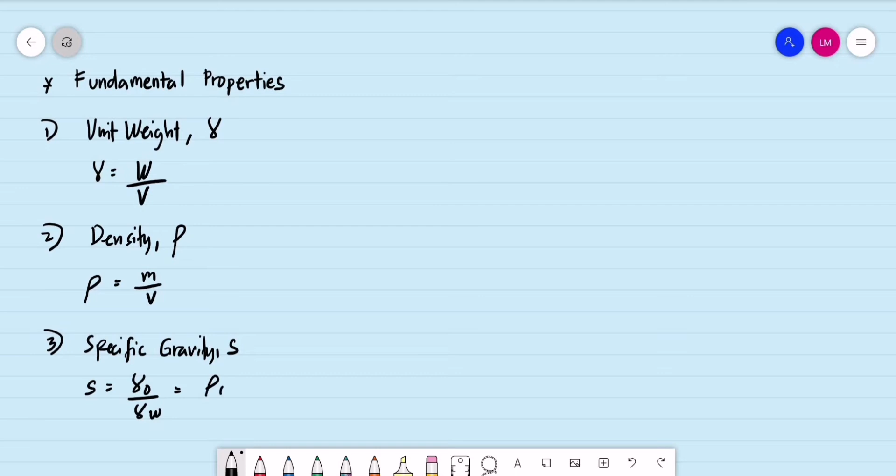So specific gravity in fluid mechanics, what we use is the small s. The specific gravity of any object is the unit weight of any object divided by the unit weight of water. Or this is the same as the density of any object divided by the density of water. If you notice, our universal reference is water.

So we should know the fundamental properties of water. We have the unit weight of water. Most of the time in board exams, this is not given. It's 9.81 kilonewtons per cubic meter. This is the same as 9,810 newtons per cubic meter, or in English units, 62.4 pounds per cubic foot. Then we have the density of water, equal to 1,000 kilograms per cubic meter. Or we can have it as 1 gram per cc or 1 gram per cubic centimeter.

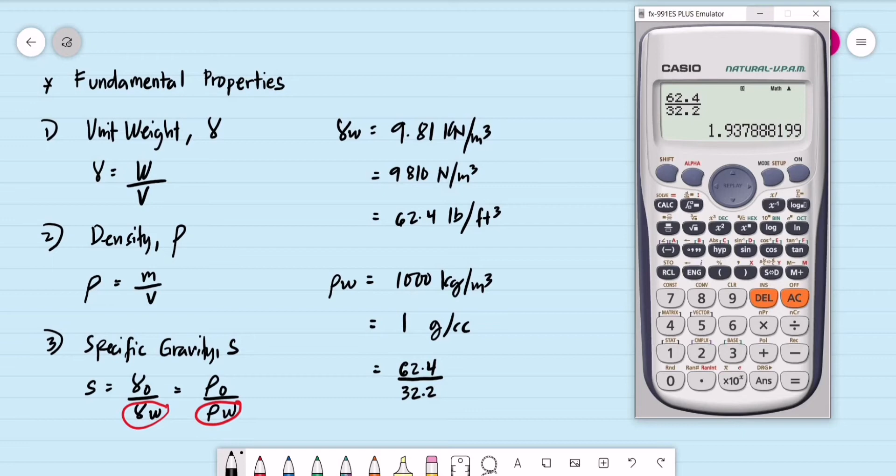In English units, this is 62.4 pound force or pound weight. We'll make it pound mass simply by dividing by the acceleration due to gravity in English units, 32.2. So what would that value be? We have 62.4 divided by g in English, 32.2. That is 1.938. This becomes pound mass per cubic foot. Or pound mass can also be called slugs. So pound mass is the same as slugs per cubic foot.

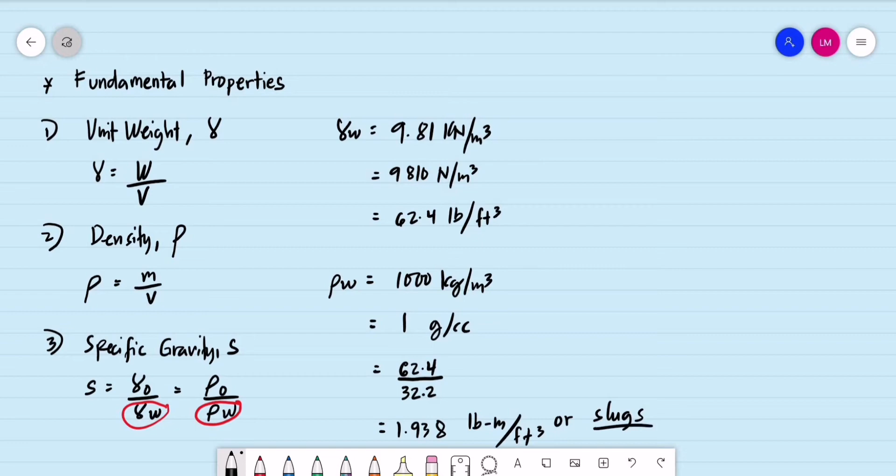So we should know these basic properties. Let's have an example that came out before in the board exam. A situational problem with 3 questions - problem 1, 2, and 3.

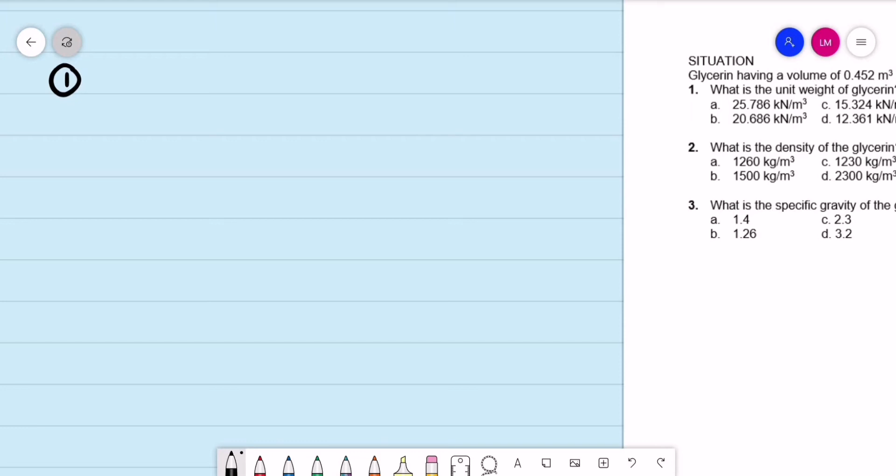So glycerin having a volume of 0.452 cubic meter weighs 5,587 newtons. What is the unit weight? Question number 1. Just observe the unit of the choices - this is in kilonewtons per cubic meter. So basically we'll just do unit analysis.

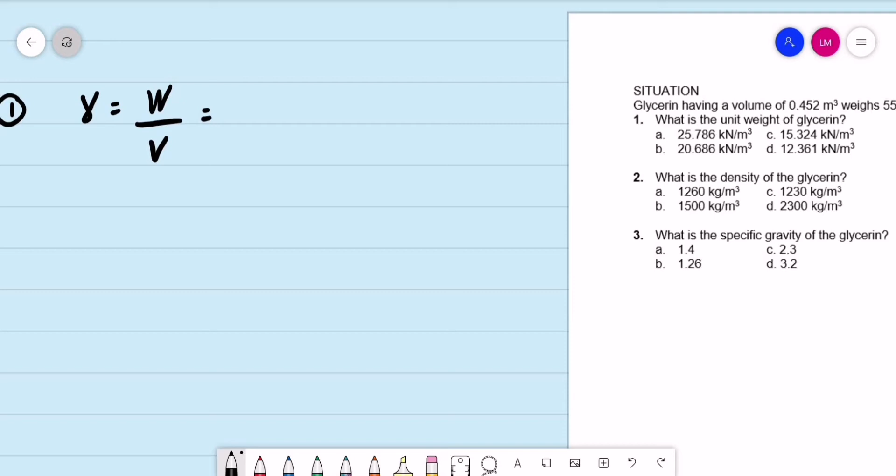So the unit weight is gamma, that is equal to the weight divided by the volume. The given weight in this problem is 5,587 newtons. Then its volume is given as 0.452 cubic meter. So we just need to convert. What is the equivalent of 1 kilonewton? This is the same as 1,000 newtons, just so we can cancel out the unit newtons.

So if you do unit analysis, what's left is the unit in kilonewtons per cubic meter. So computing for number 1, this is 5,587 divided by 0.452, then divided by 1,000, so it becomes kilonewtons per cubic meter. Let's say this is 12.361 kilonewtons per cubic meter. So that's how number 1 goes. Our answer for number 1 will be letter D, 12.361 kilonewtons per cubic meter.

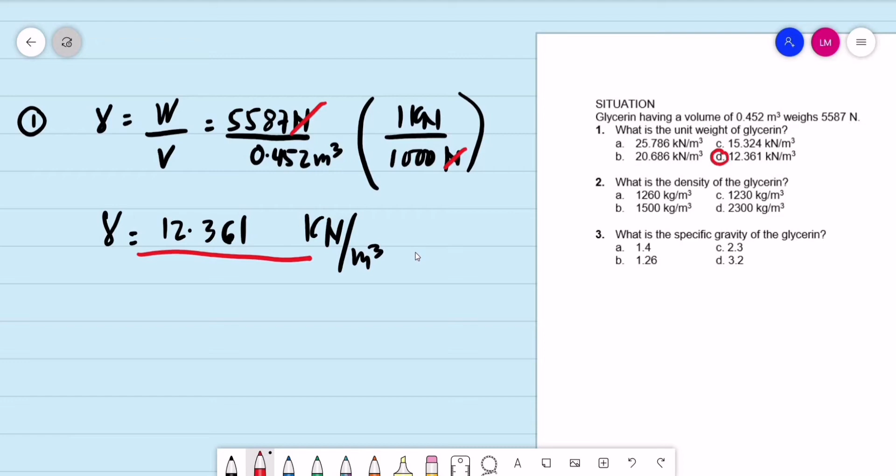So for number 2, what is the density of the glycerin? The unit is kilograms per cubic meter. For number 2, density is equal to mass divided by the volume. So let's convert the weight into mass.

We have the density equal to 5,587 newtons divided by the volume, 0.452 cubic meter, multiplied by - what is the equivalent of 1 kilogram in newtons? This is 9.81 newtons, so 9.81 newtons is 1 kilogram. We cancel out the unit newtons, so what's left will be the unit kilograms per cubic meter.

So we'll be getting the density. The density will be equal to 5,587 divided by the volume, 0.452, divided by 9.81. So this is equal to 1,260.002.

Okay, 1,260.002. Ang unit na naiwan ay kilograms per cubic meter. So sa choices natin, 1,260, that will be letter A.

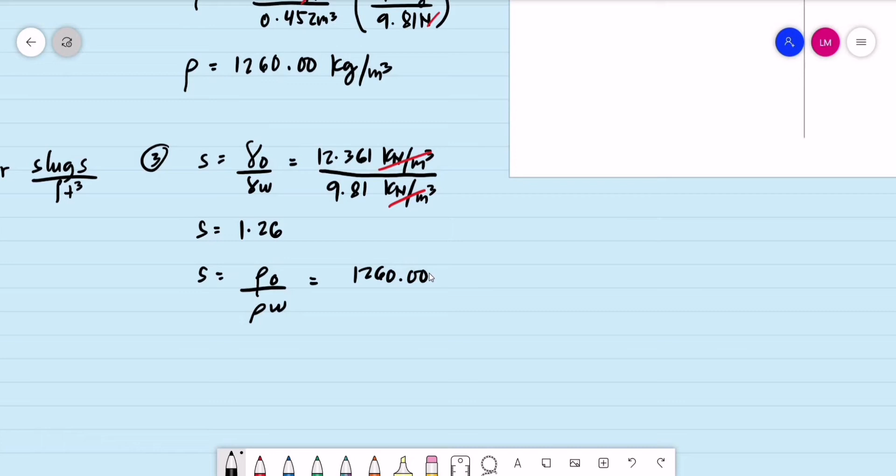Pwede rin naman gamitan class ng rho. Kung gagamit naman tayo ng rho, the specific gravity is the density of any object divided by the density of water. Ano ba yung nakuha natin na density? 1,260.00002 yata ito kanina, dapat yung unit nito ay kilograms per cubic meter. So dapat unitless, dapat the same unit yung rho water, density of water, 1,000 kilograms per cubic meter. So canceling yung unit, ang specific gravity natin will be the same as 1.26. So it's either using yung gamma, pwede tayong gumamit ng gamma, o di kaya density.

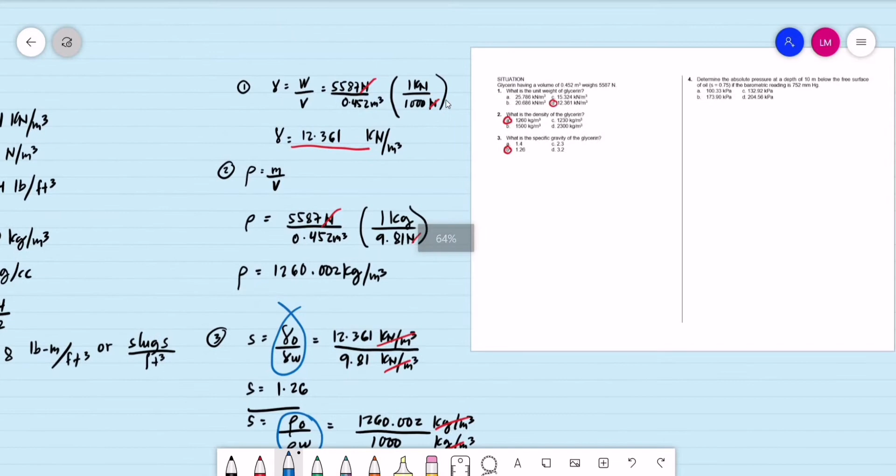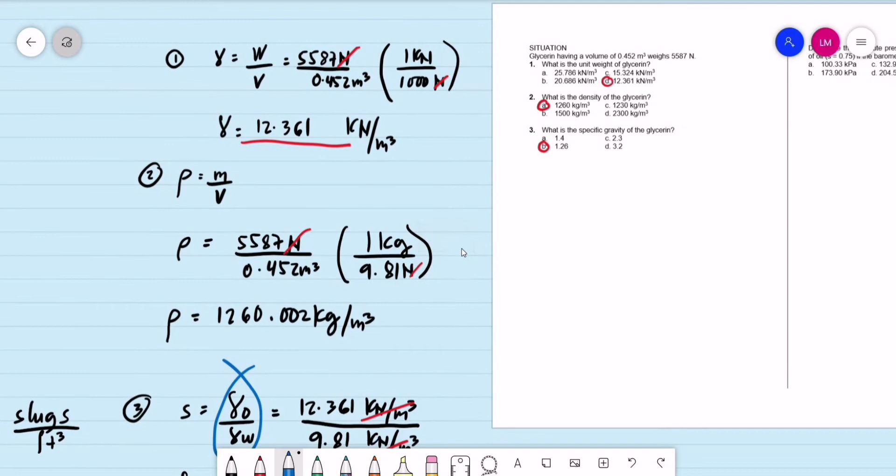Ito yung mga tinatawag natin na appetizer problem sa hydraulics, pati rin naman sa geotech. It's either lupa or tubig or any liquid. Ito yung mga tinatanong minsan: the unit weight, the density, at the specific gravity. So that will be our solution for problem 1 to 3.

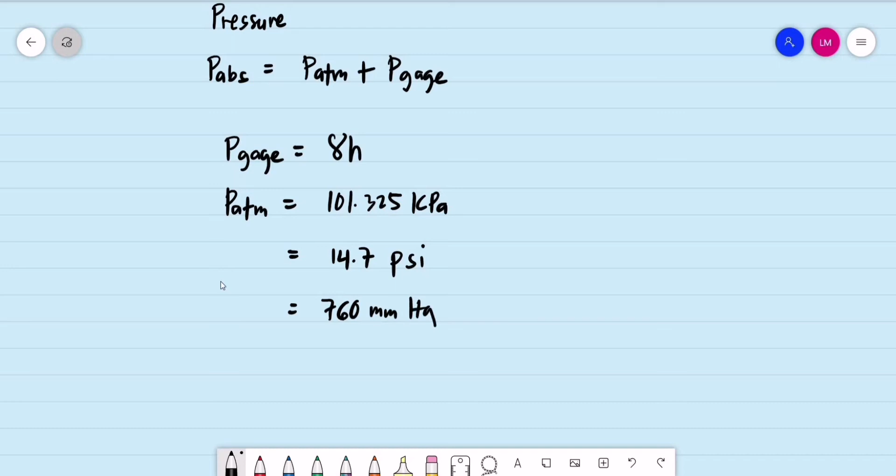Pag-usapan naman natin ang pressure. Dito sa fluid mechanics, meron tayong tinatawag na absolute pressure o pressure absolute. Ang equivalent nito ay yung atmospheric pressure plus the pressure gauge. Basically, pressure gauge, supposedly pressure reading ito using a gauge. Pero dito, kapag manual computation, ito yung gamma H. Sa ilang cases na hindi given ang atmospheric pressure o PATM o barometric pressure, gamitin natin yung constants: 101.325 kilopascals, o pareho lang ito sa 14.7 pounds per square inch kapag English. Kapag in terms of the height of mercury naman, ito yung 760 millimeters of mercury. Yung mga values na ito ay sa sea level, yung atmospheric pressure at sea level.

Let's have an example, problem number 4. Determine the absolute pressure at a depth of 10 meters below the free surface of oil with a specific gravity of 0.75, if the barometric reading is 752 millimeters of mercury. So meron tayong oil dito na ang specific gravity ay 0.75. Ang depth ng liquid ay 10 meters.

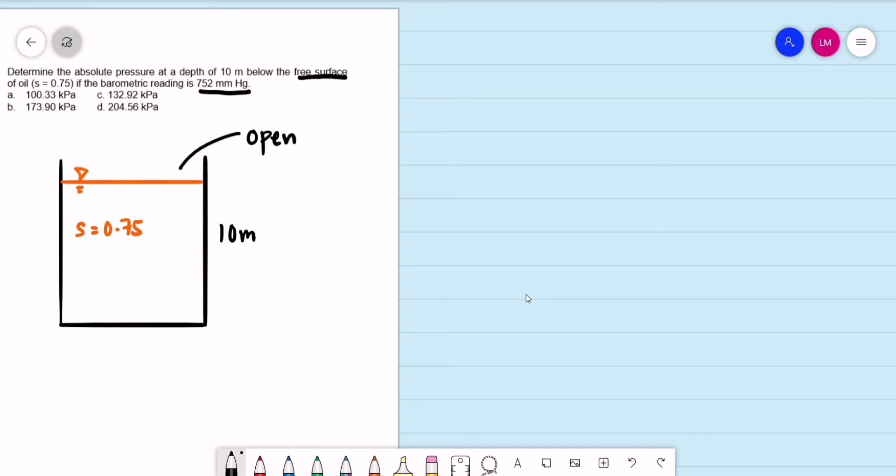Kapag ginagamit rin yung term na open tank o yung sinabi niyo sa problem na ito, free surface, magko-consider tayo ng atmospheric pressure. Kapag sinabing closed tank, magne-neglect tayo ng atmospheric pressure. So hinahanap yung absolute pressure, that is P absolute is equal to the atmospheric pressure, PATM, plus the pressure gauge, sabihin ko na lang P sub G. Pero in terms of the height of mercury, most of the time sa mga board, hindi given yung specific gravity ng mercury, so dapat alam natin na yung specific gravity ng mercury ay 13.6.

So yung given na height niya is 752 millimeters, kung gagawin kong meter, ito yung 0.752 meters of mercury. Ang gagamitin na lang natin sa pagkuha ng pressure absolute dito, pressure absolute is the summation of gamma H. Paano pala kumuha ng gamma ng ibang liquid? Ang specific gravity ay unit weight of any object divided by unit weight of water. Kaya kung gusto kong kumuha ng gamma o unit weight ng ibang object o ibang liquid, ito yung kanyang specific gravity times the gamma of water. So summation of gamma H tayo.

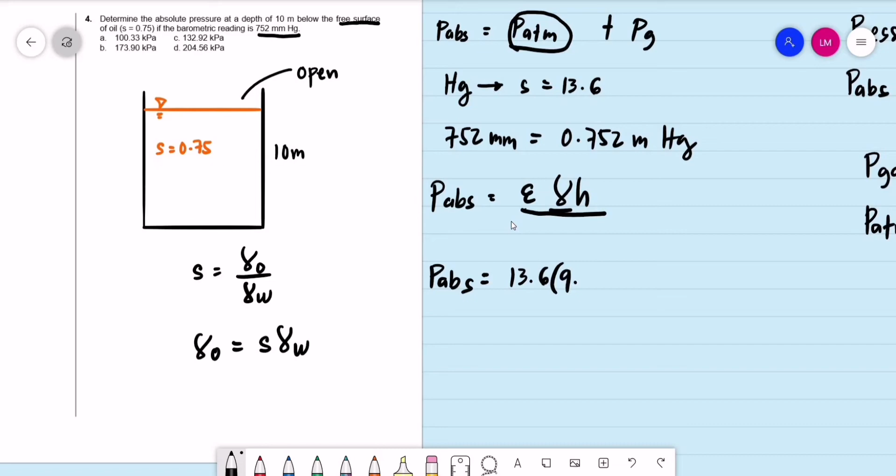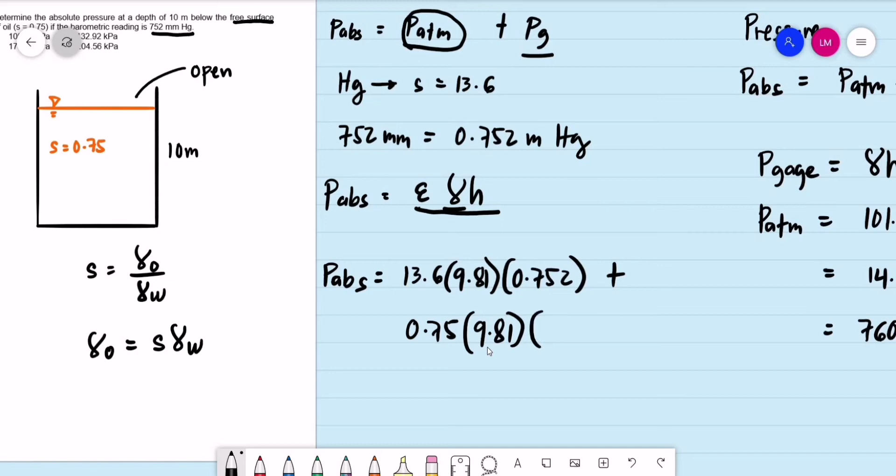We have the pressure absolute, unahin natin yung atmospheric pressure. Atmospheric pressure is mercury, ano yung gamma ng mercury? Ito yung 13.6 times gamma water, 9.81. Ano yung height ng mercury o yung barometric pressure, the atmospheric pressure? That is 0.752 meters o yung given na 752 millimeters. Ito yung ating PATM, plus pressure gauge is gamma H. Ano yung unit weight ng oil? Ito yung 0.75 para maging gamma ng oil times gamma water, 9.81. Ano yung height ng oil? Given na 10 meters. So this will be the total pressure dun sa ilalim ng tank o ang absolute pressure.

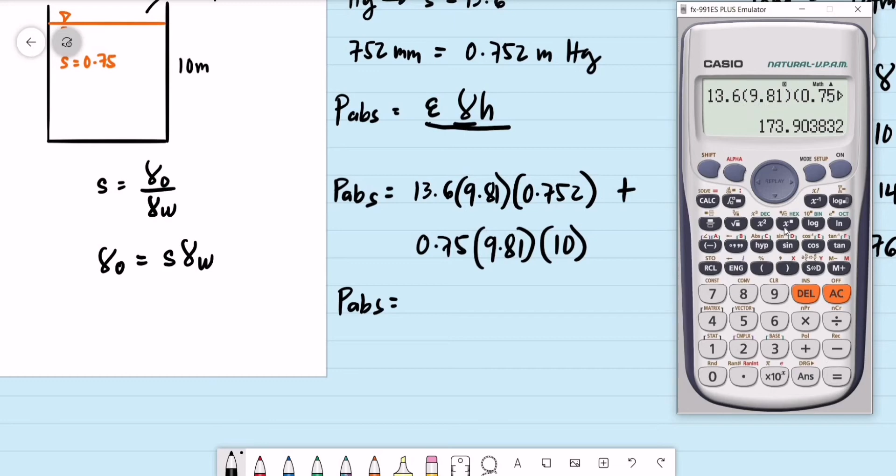So computing for that value, that is 13.6 times 9.81, ito yung gamma ng mercury, yung height dun sa barometer is 0.752, ginawa kong meter. Plus sa oil, 0.75 times 9.81, ito yung gamma oil, yung height ng oil ay 10 meters. So that will be equal to 173.904.

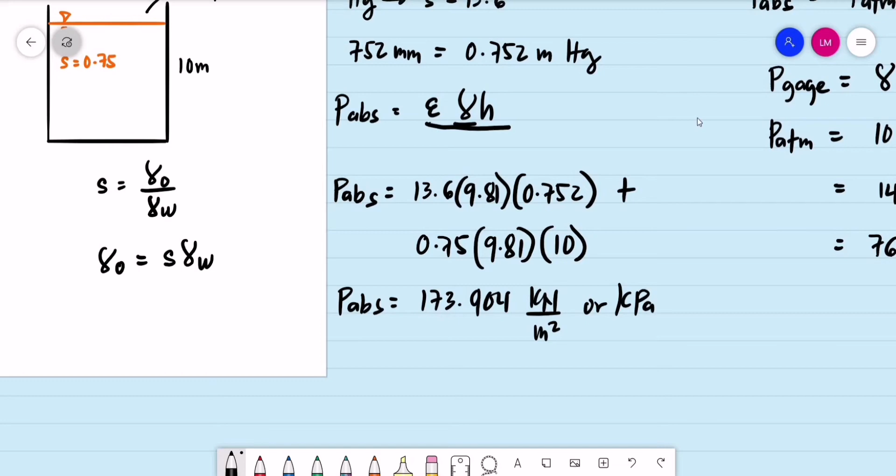Kilonewtons per square meter, kung mag-unit analysis tayo, kilonewtons per square meter or pareho lang ito sa kilopascals. Okay, check natin sa choices. Problem number 4, pinakamalapit na value, 173.9, that will be letter B for question number 4. So ito yung solution natin for problem number 4.

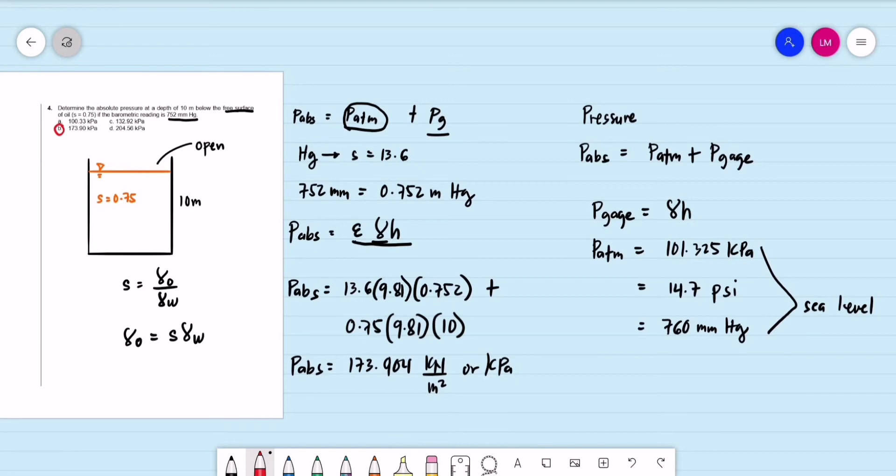Okay, so dito naman tayo sa problem number 5. In the figure shown, if the atmospheric pressure is 101.03 kilopascals and the absolute pressure at the bottom of the open tank is 231.3 kilopascals, what is the specific gravity of the unknown liquid?

Okay, so take note na kapag layers of liquid, as we go down, habang papailalim, yung specific gravity ay nag-i-increase. So kung i-observe natin, 0.89, 1, so basically that is water. Ito yung unknown specific gravity. Tapos mercury, 13.6.

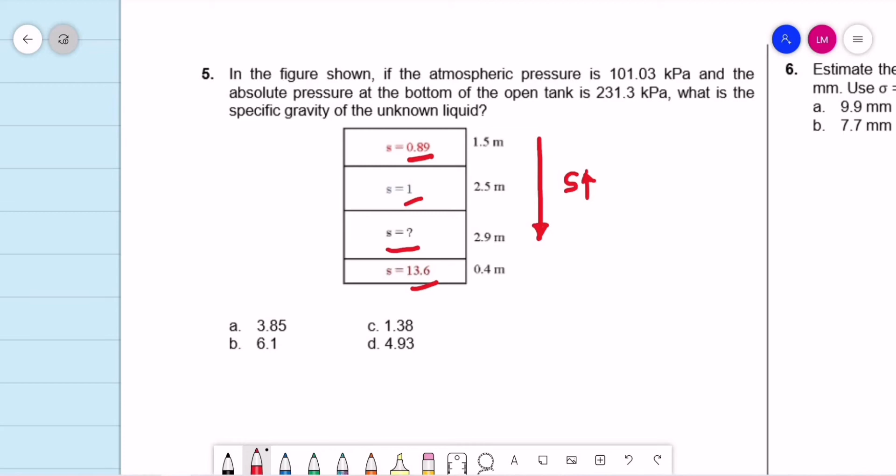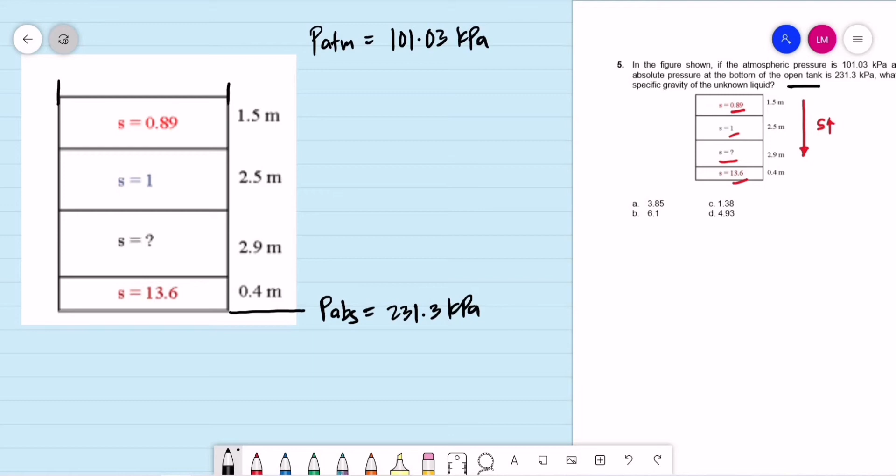Okay, so according dito sa problem, meron tayong atmospheric pressure. So let's say we have P atm. Ito yung given, kaya ito yung gagamitin natin, 101.03 kilopascals. Then P absolute dito sa ilalim ng tangke, we have the absolute pressure is equal to 231.3 kilopascals. So sinabi niya rin class sa problem na open tank, okay, so this is an open tank. So supposedly open yung tangke natin, so hindi siya parang close, kagaya nitong sa figure.

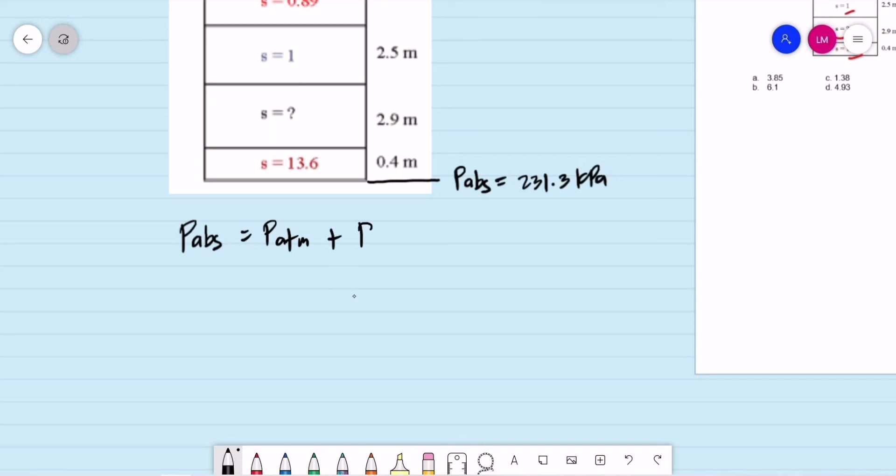So how do we compute for absolute pressure? Ano ba equivalent ng absolute pressure? We have P absolute, the pressure absolute is basically equal to the atmospheric pressure, P atm, plus the pressure gauge. So sabihin ko na lang P sub G yung pressure gauge. So ano yung magnitude ng P absolute? We have 231.3 kilopascals is equal to P atm, 101.03 kilopascals plus the pressure gauge.

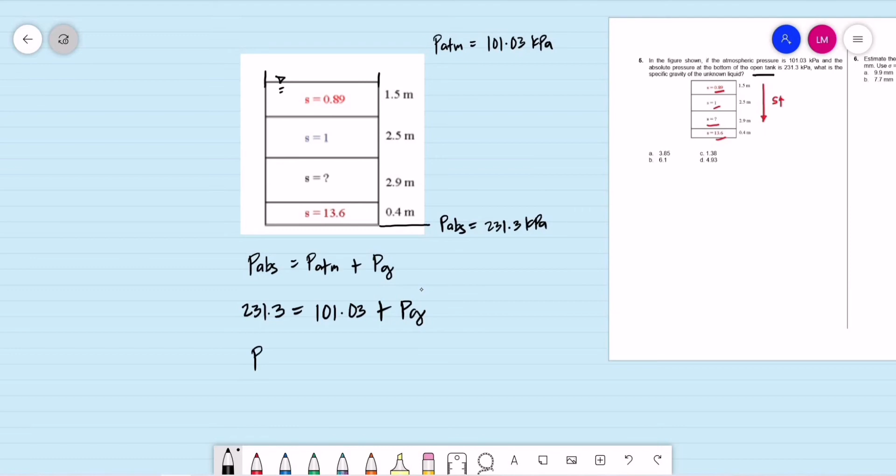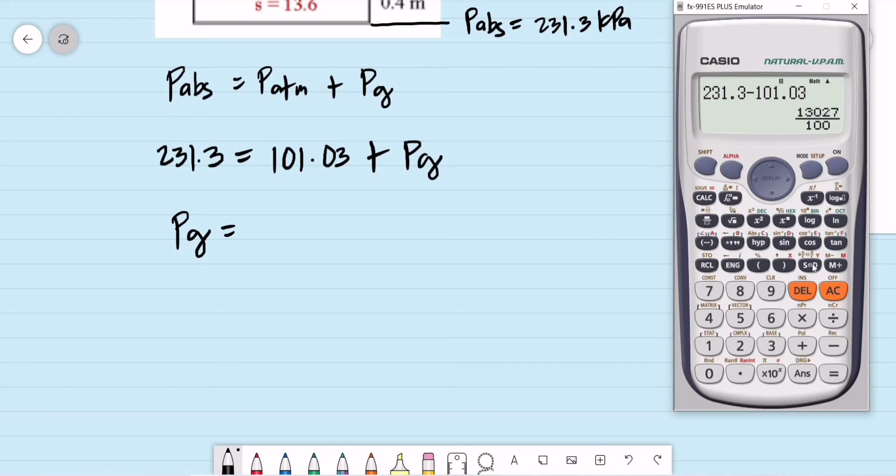So compute natin yung equivalent ng pressure gauge. So that is the same as 231.3 minus 101.03. So yung lumabas dito is equal to 130.27 kilopascals. So yung pressure gauge na ito ay supposedly pressure reading using a gauge. So paano ba tayo nagko-compute ng pressure gauge? Kapag layers of liquid, ito yung summation of the unit weight of the liquid multiplied by their corresponding height. So dapat in terms of kilopascals, we have that as 130.27 kilopascals.

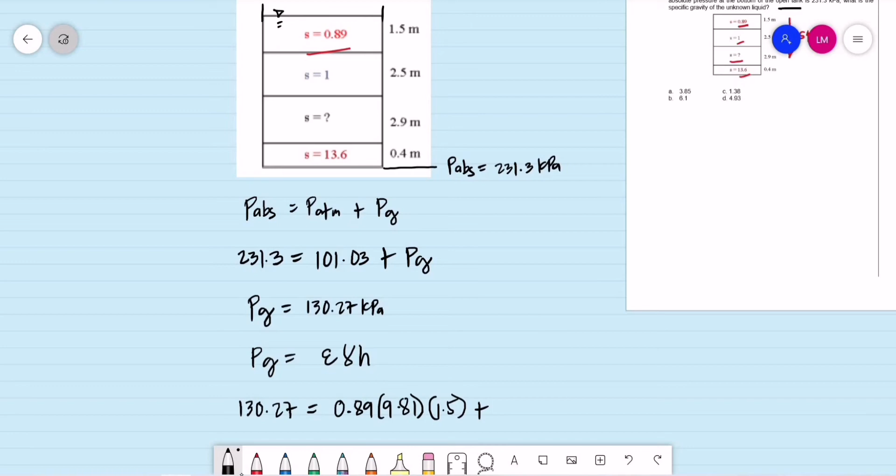Is equal to, consider natin yung first liquid, meron siyang specific gravity na 0.89 times gamma water, 9.81, para maging unit weight ng liquid na ito. Then multiplied by its corresponding height, 1.5 meters. Then plus, the next specific gravity is 1, tubig lang ito, that is 9.81 times yung height niya ay 2.5 meters. Then plus, yun yung specific gravity ng unknown liquid, S, times gamma water, 9.81, tapos corresponding height is 2.9 meters. Okay, plus yung last layer natin is mercury, we have that as 13.6 times 9.81, yung kanyang height is equal to 0.4.

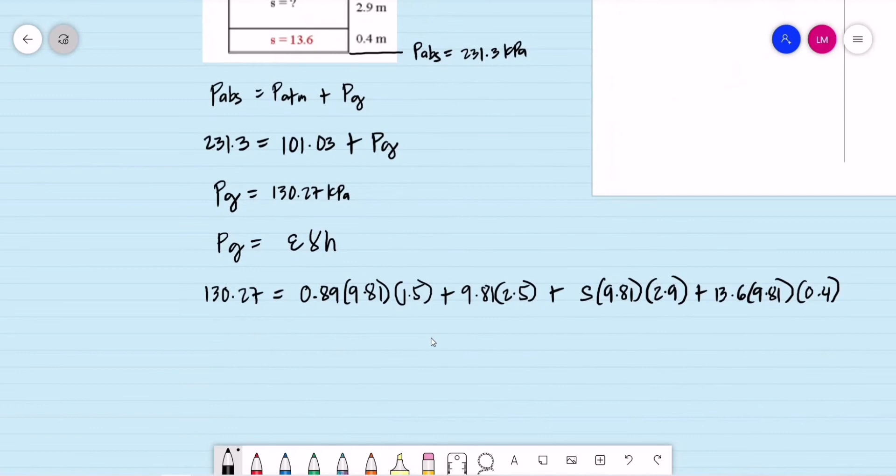So kung titingnan natin yung equation na ito, ang unknown na lang is yung specific gravity S. So let's compute. So we have that as 130.27 is equal to, yung first layer is 0.89 times gamma water, 9.81, corresponding height is 1.5 meters. Then plus, tubig lang, 9.81, its height is 2.5. Then plus, sabihin na lang natin, S for the unknown liquid ay 9.81, tapos yung height niya is 2.9 meters. Then plus, last layer, mercury, 13.6 times 9.81, yung height niya is 0.4. So shift solve tayo.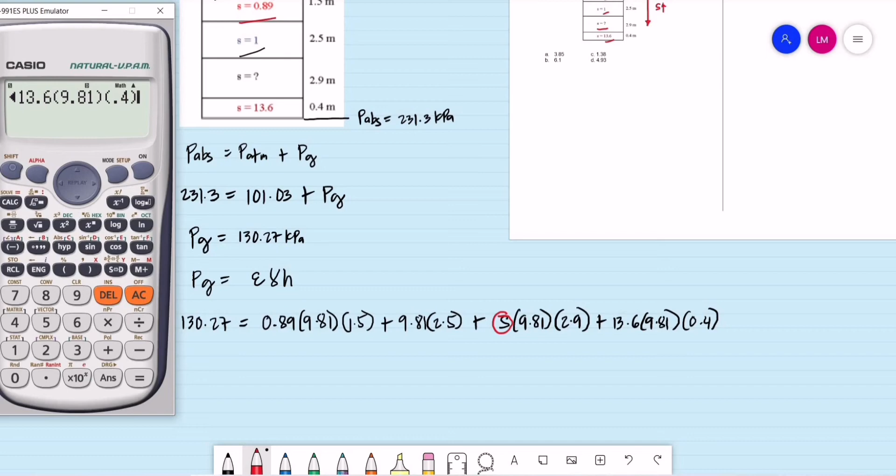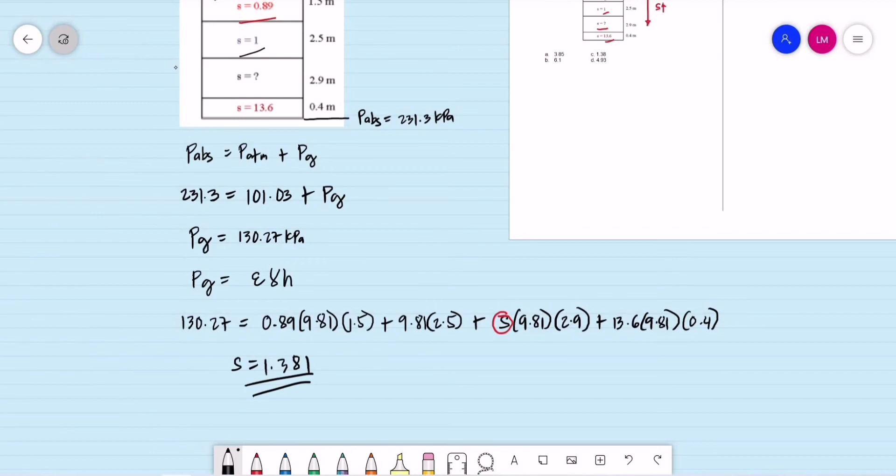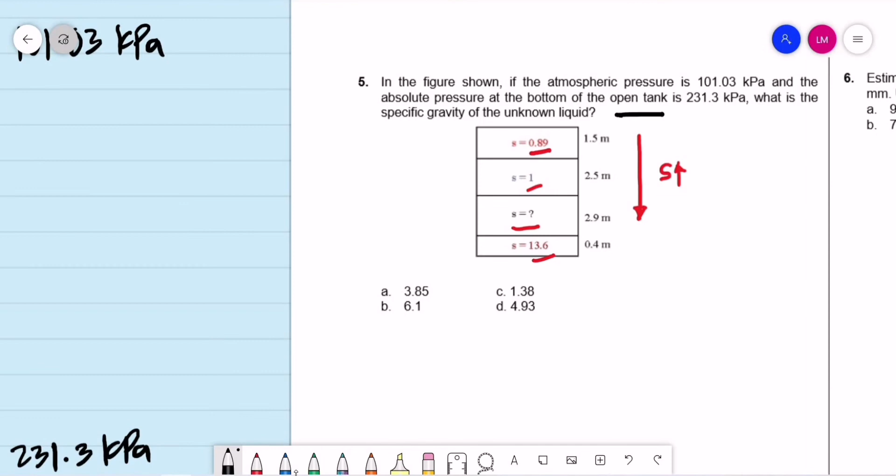So yung lumabas dito is equal to, we have the specific gravity of the unknown liquid is 1.381. Okay? So that is 1.3807 or 1.381. If you are to check that value sa choices natin, so 1.381 for question number 5, so that will be letter C. So this will be our solution for question number 5.

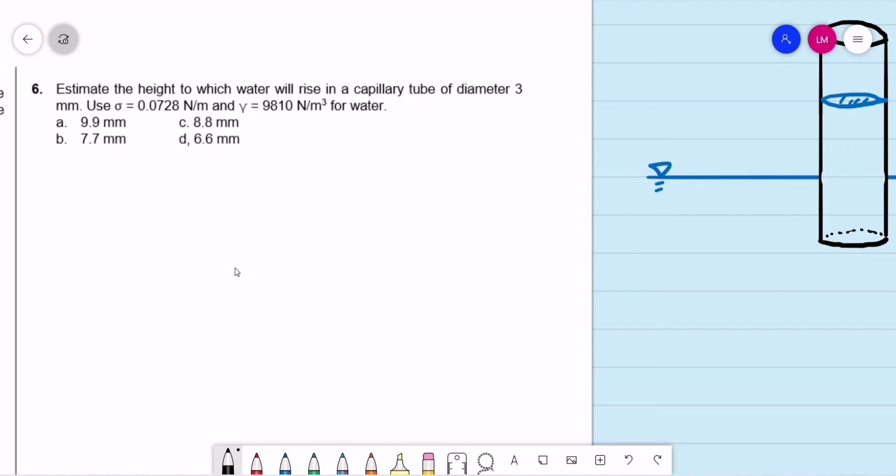Okay, so we go to problem number 6. Estimate the height to which water will rise in a capillary tube of diameter 3 mm. Use sigma equal to 0.0728 Newton per meter. And alam natin ito, gamma water, 9,810 newtons per cubic meter. So ito yung capillary rise. Ito yung kapag nagsawsaw tayo ng maliit na tube. Okay, kindly observe, napakaliit ng diameter, 3 mm. Kapag nagsawsaw tayo ng maliit na tube sa isang liquid, ang mangyayari is papasok yung liquid.

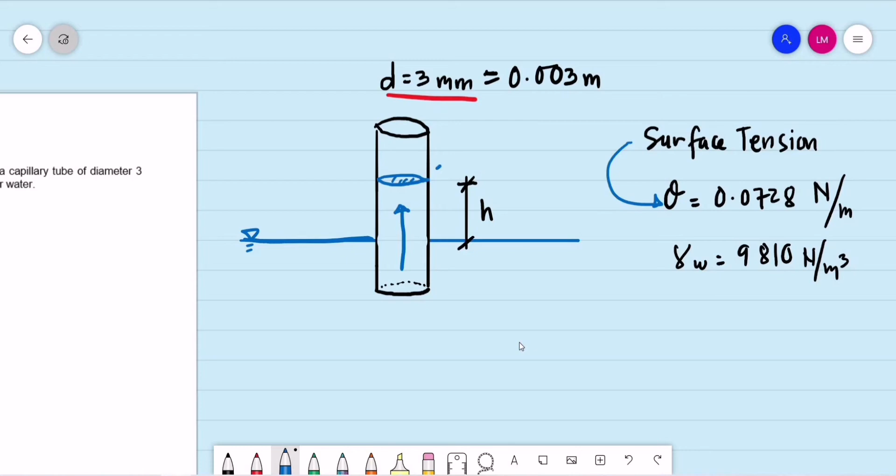Okay, that is, tataas siya compared to the normal level ng liquid. So, kakapit siya dito sa tube. Bakit siya kakapit? That is because of the surface tension. So, yung sigma na given kanina, yun yung surface tension.

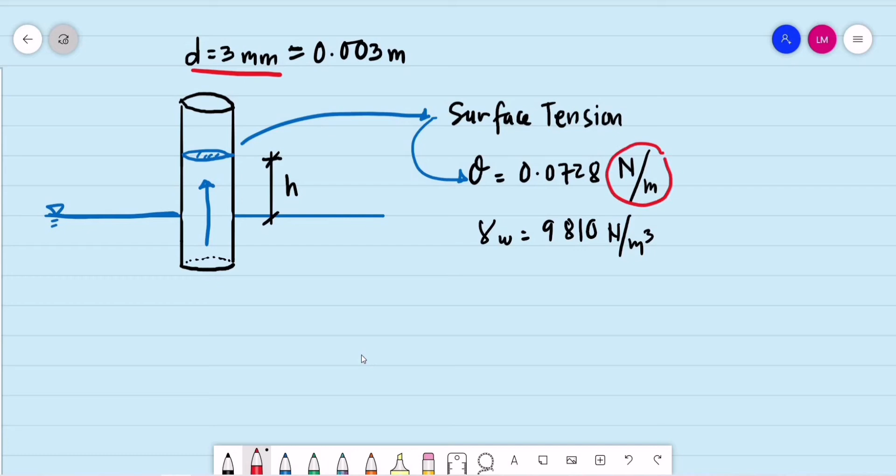Usually, ang given na unit nito sa mga problems ay nasa Newton per meter. So, how do we compute for the rise of the liquid? We have the formula H is equal to 4 times the sigma, or the surface tension, then cosine of theta divided by the unit weight of the liquid times the diameter of the tube. Basically, yung formula na to nanggaling lang sa summation forces vertical equal to 0.

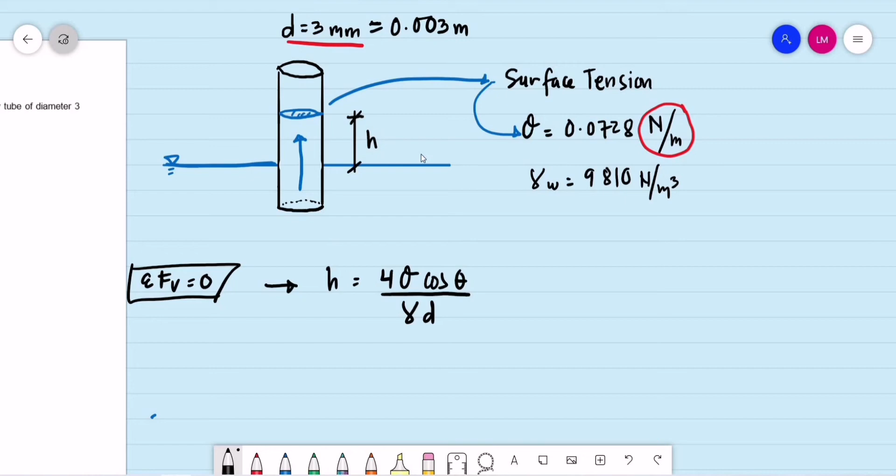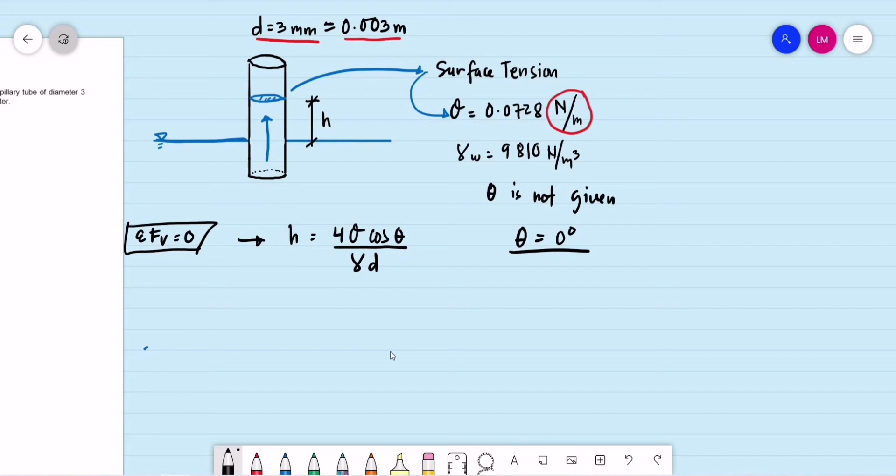So, summation forces lang yung pinanggalingan ng derivation niya. Okay, gawin natin na meter na lang yung diameter. That is 3 millimeters or 0.003 meter, para lang lahat ng given is in terms of meter. Then, kung hindi given yung value ng theta, we can assume the value of theta to be 0 degree. So, in some cases, kapag hindi siya given, pwedeng 0 degree. So, we have the capillary rise.

Let's substitute. We have the capillary rise equal to 4 times, the sigma is 0.0728 Newton per meter, that is the surface tension. Cosine of 0 degree, pero alam natin ang cosine 0 is simply equal to 1. Divided by the gamma water, 9,810 newtons per cubic meter. Then, the diameter of the tube, in meter na rin, 0.003 meter.

Yan. Kung mag-unit analysis tayo dyan, cancelling newtons, meter, meter, meter cube. So, cancelling yung meter na to, ang maiwan dito is meter na lang. Then, pupunta na siya sa numerator since denominator siya dun sa baba. We'll be having the value of H in terms of meter. Pero nasa millimeter yung nasa choices, kaya mag-multiply tayo ng 1,000 mm. This is per 1 meter. So, this will be the capillary rise.

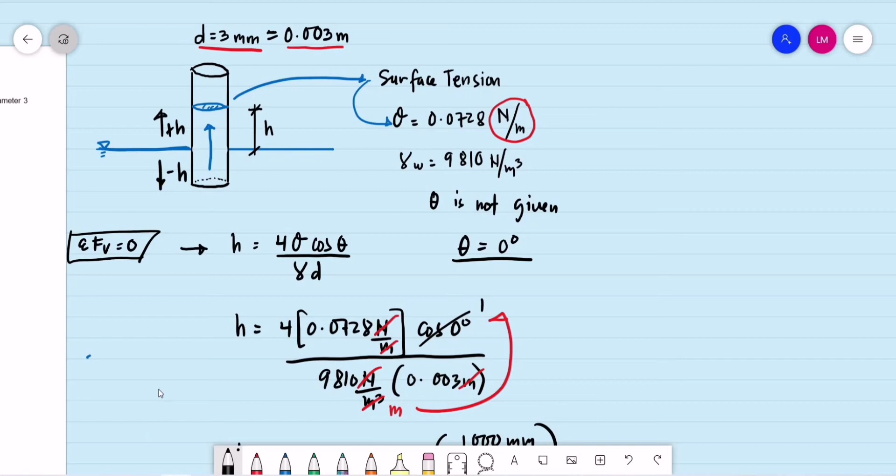So, kapag positive pala, kapag positive, obviously, pataas. Kapag positive yung H, pero kapag pababa naman, ibig sabihin nun, ang lalabas dapat is negative H. Yun naman yung capillary depression. So, computing for the value of H,

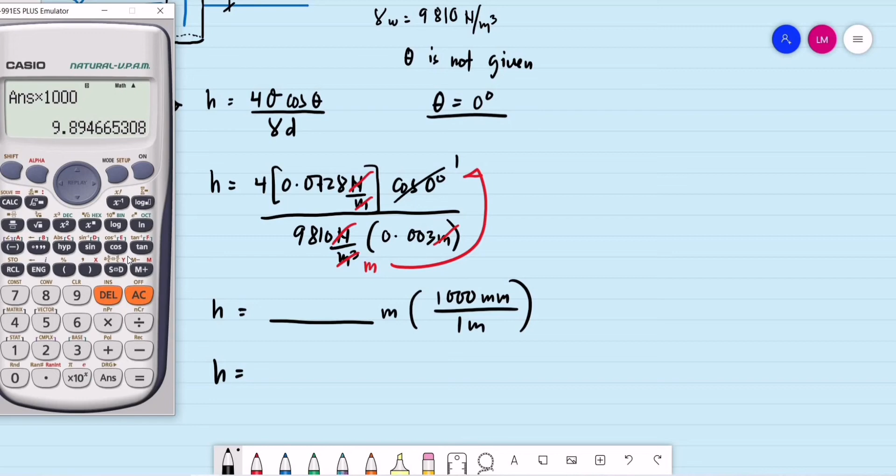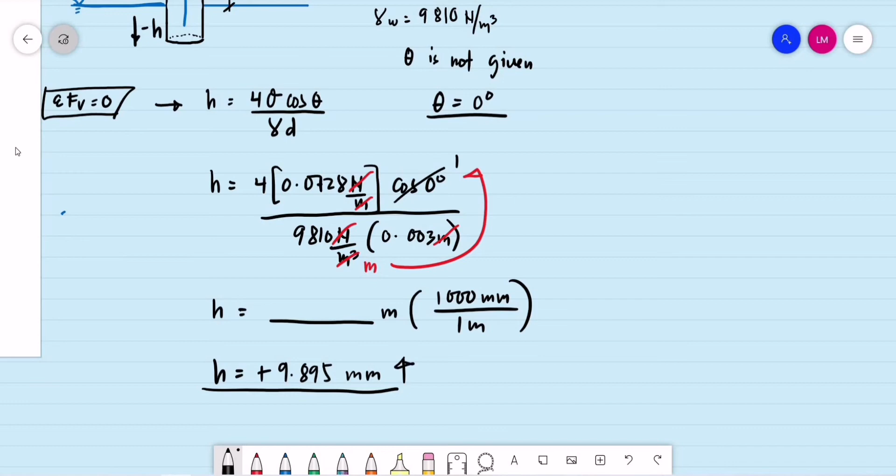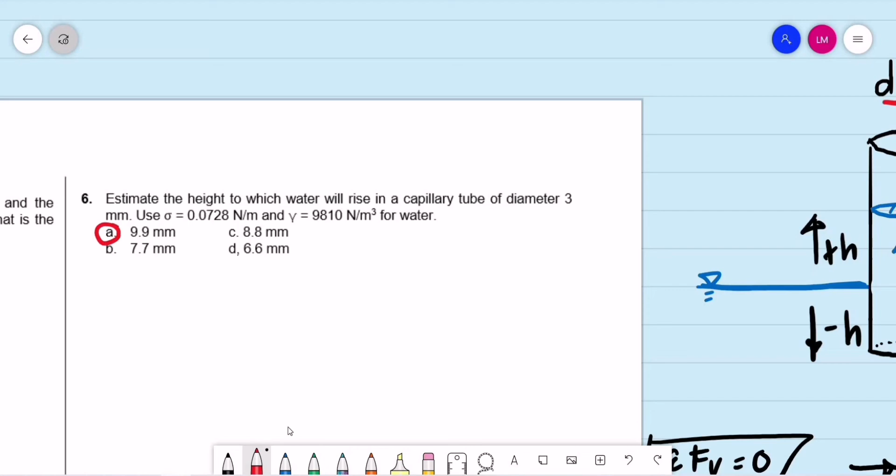4 times 0.0728, this is divided by gamma water is 9,810 times 0.003. So, this will be in terms of meter. Times 1,000 para maging millimeters, yung sagot natin, that will be equal to 9.895 millimeters. And it is positive, kaya ibig sabihin, capillary rise. Check natin sa choices, 9.895 mm. So pinakamalapit na sa choices natin will be letter A, 9.9. So this will be our solution for problem number 6, the capillary rise.

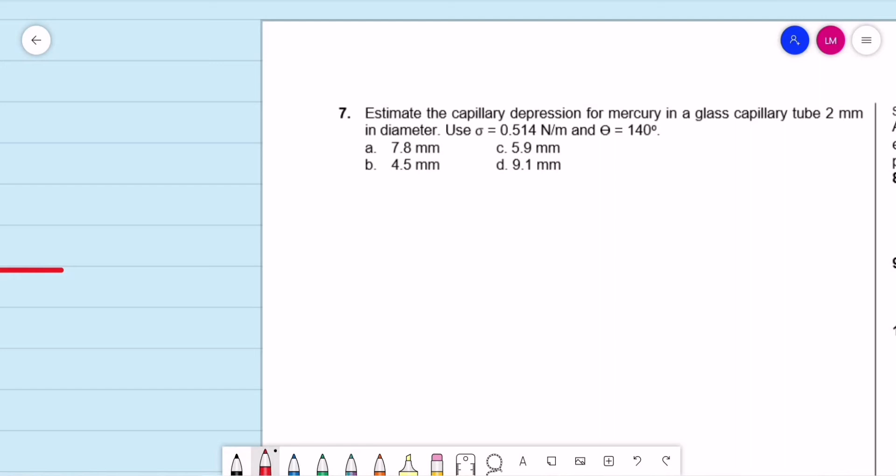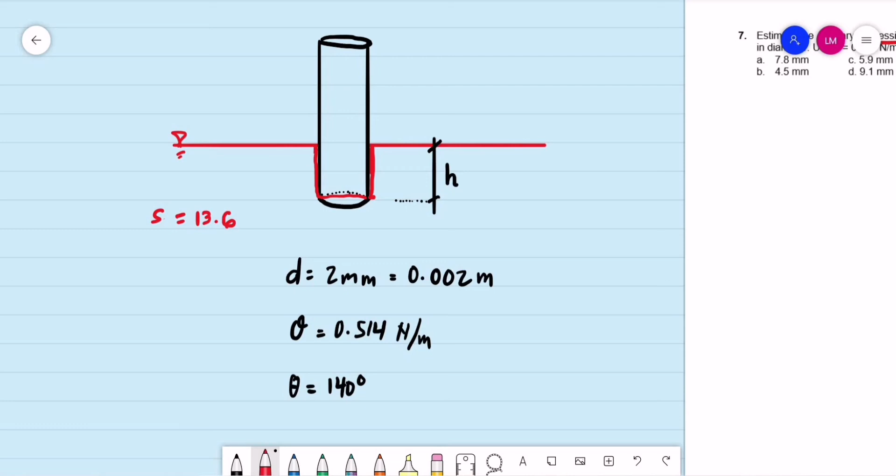Tuloy natin sa problem number 7. Estimate the capillary depression for mercury in a glass capillary tube 2 mm in diameter. Use sigma equal to 0.514 Newton per meter and theta is equal to 140 degrees. So, nangyayari yung capillary depression kapag malapot yung liquid or high viscous yung liquid or mataas yung viscosity. For example, kung magdidip tayo ng tube dito sa liquid mercury, hindi makakapasok yung liquid doon sa loob ng tube. So, ang term doon is the capillary depression. So, ito yung mga given, diameter, the surface tension, tapos given yung value ng theta equal to 140 degrees.

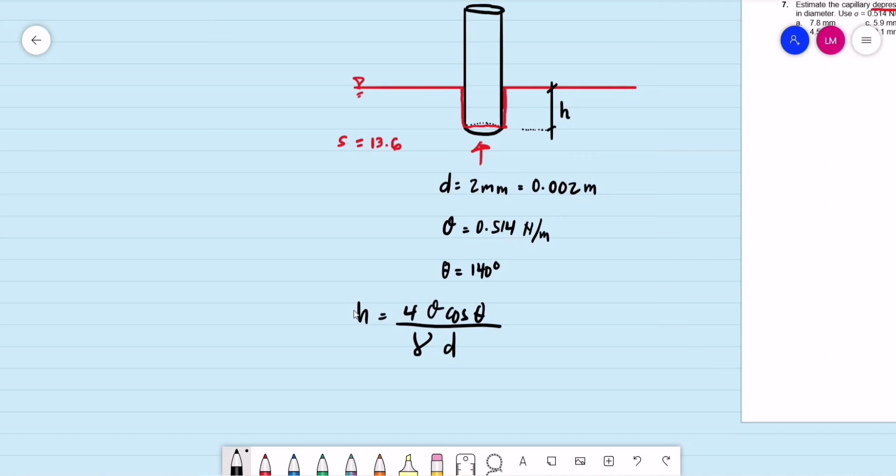So, computing for the capillary depression, H is equal to 4 times the sigma, cosine of theta, divided by the unit weight of the liquid times the diameter of the tube. So again, most of the time, hindi given yung specific gravity ng mercury, kaya paki-memorize. Okay, kunin natin yung equivalent value ng H. Substitution: 4 times 0.514 Newton per meter, multiplied by the cosine of theta, cosine of 140 degrees. To be divided by gamma ng mercury, that is 13.6.

Gamitin natin dito 9,810 newtons per cubic meter para consistent sa unit, that is for the gamma water. Diameter ng tube, 0.002 meter. So we'll be having the value of H. Kung unit analysis, cancelling newtons, this is meter, meter, meter cube. Itaas natin yung remaining unit, that is the meter. So ang expected unit ng value na to will be in meter.

So that is, we have 4 times 0.514, then cosine of 140 degrees, to be divided by gamma ng mercury, 13.6 times gamma water, 9,810. Tube diameter is 0.002. So we have that as, yung sign is negative 5.903 times 10 raised to negative 3 meter.

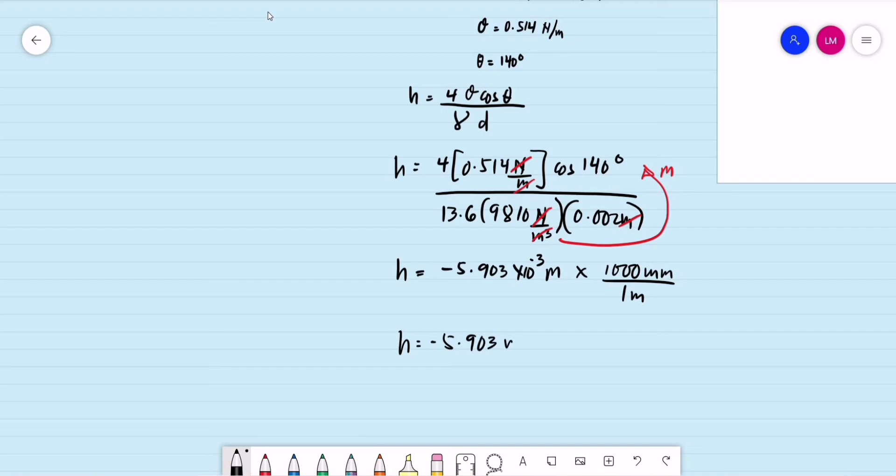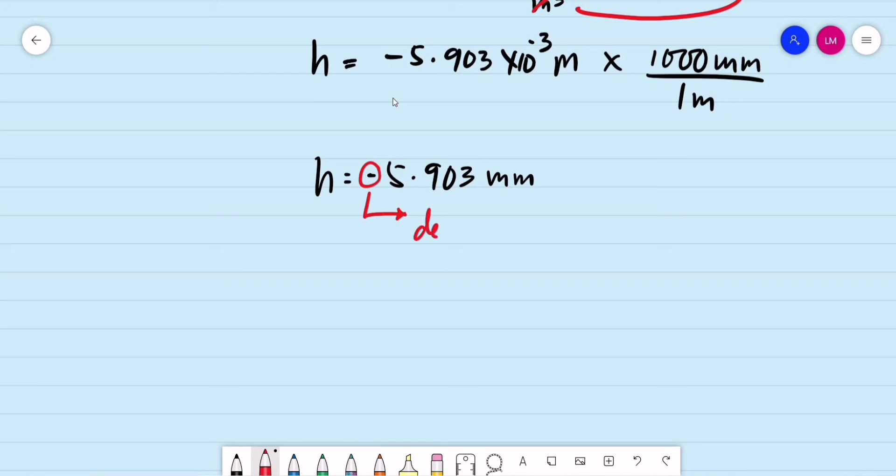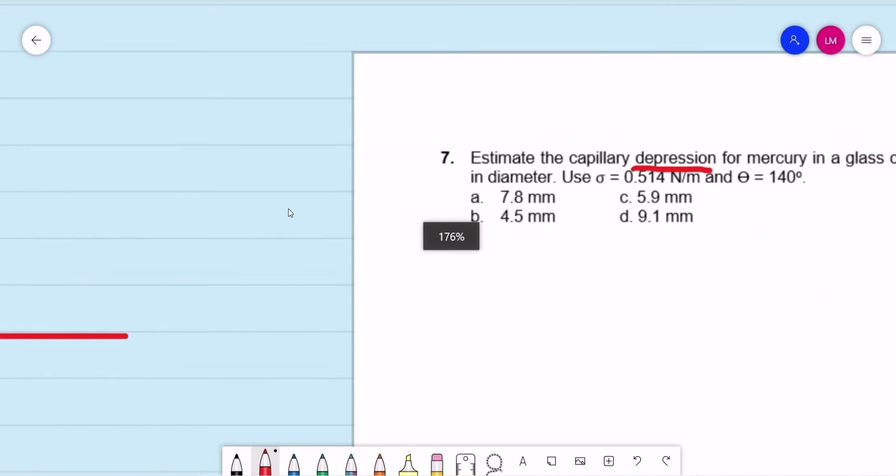Millimeters. Ano yung ibig sabihin ng negative sign? Basically, kapag negative yung nakukuha natin dito sa capillary, ang ibig sabihin lang naman ng negative is depression, the capillary depression. So check natin if we have this value sa choices, negative 5.903. Absolute value lahat nung nasa choices, lahat ay positive. So that will be letter C, 5.9 millimeters. That will be our solution for problem number 7.

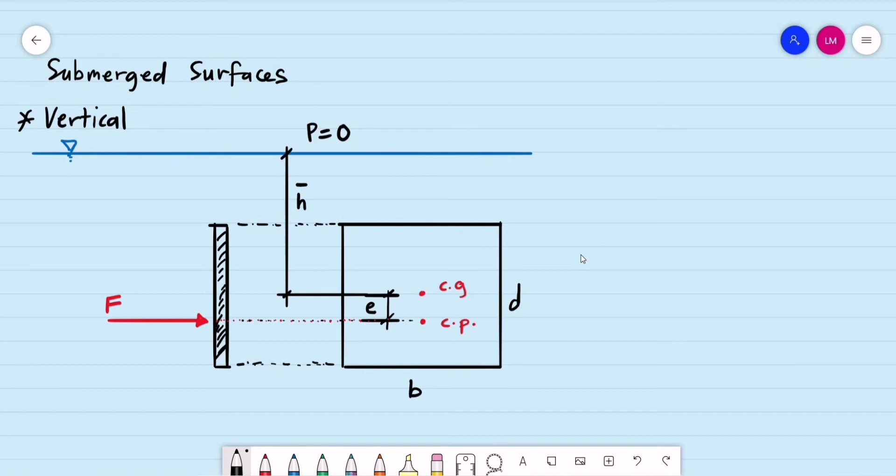We proceed to submerged surfaces. Unahin natin yung vertical submerged surface. So for example, we have this rectangular plate. Sabihin na lang natin na yung kanyang dimension ay B times D. The usual na tinatanong dito sa submerged surface is yung pag-compute ng total force acting on the submerged plate. So how do you compute for that force?

Kapag tubig, yung term is the hydrostatic force. That is, the force is equal to the unit weight of the liquid multiplied by the bar H multiplied by the area. Kung rectangular lang naman siya, basically the area is B times D.

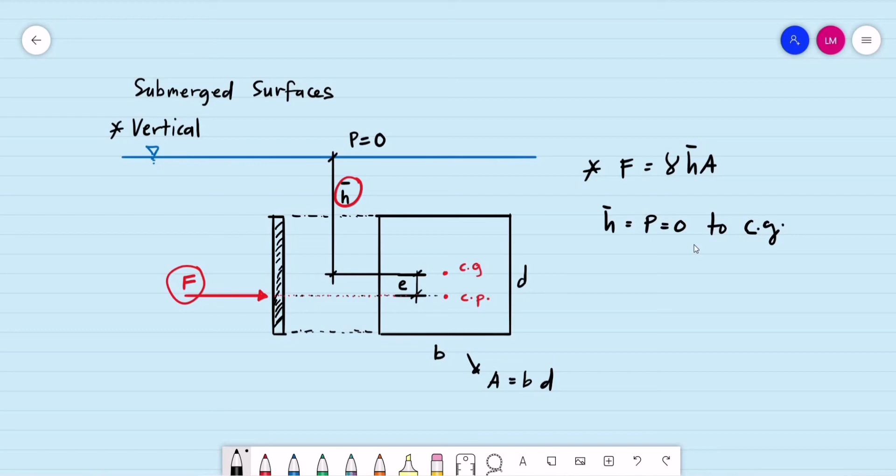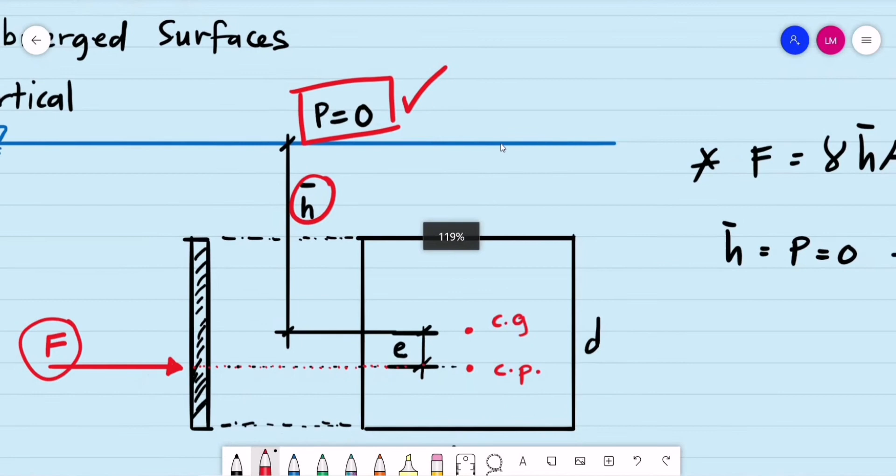Ano naman yung definition natin ng bar H or the H bar? Take note na applicable lang yung H bar na to kapag zero pressure yung surface, papunta sa center of gravity. Basically that it's the distance from the liquid surface considering na sinabi niya sa problem na zero pressure yung liquid surface. That is from the liquid surface to the center of gravity. That is the definition of bar H natin.

So zero pressure at the surface to the center of gravity. Kapag may pressure, for example kapag yung pressure sa liquid surface is not equal to zero, this formula is not applicable.

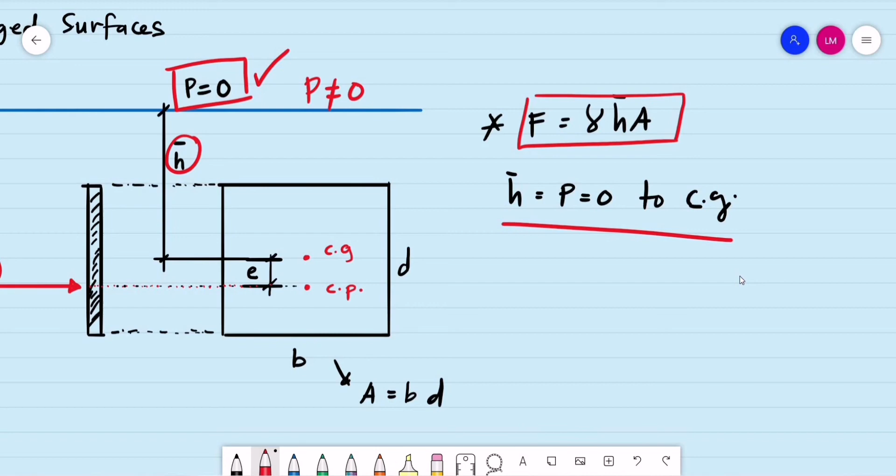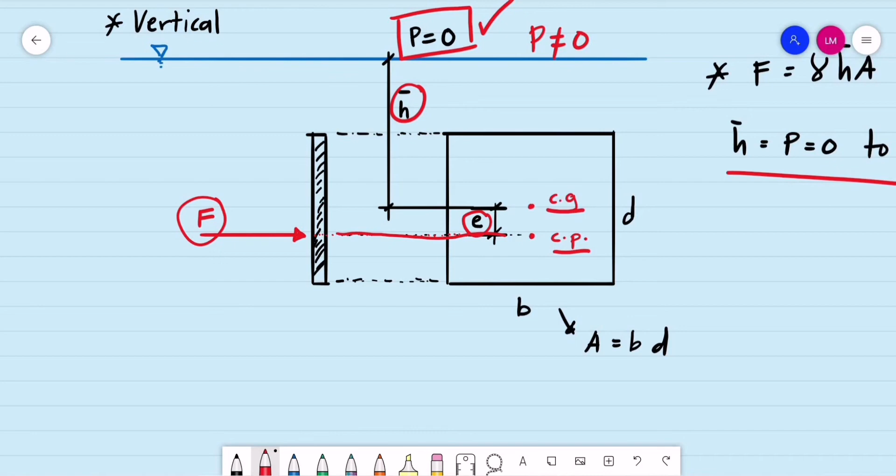So hopefully alam natin yung limitation ng formula na to. So saan ba yung point of action ng total force? Yung point of action of the total force is yun yung C sub CP. Sabihin na lang natin CP, that is the center of pressure. That is at a distance E from the center of gravity. So ano yung definition natin for E? Yung E dito is yung tinatawag natin na eccentricity.

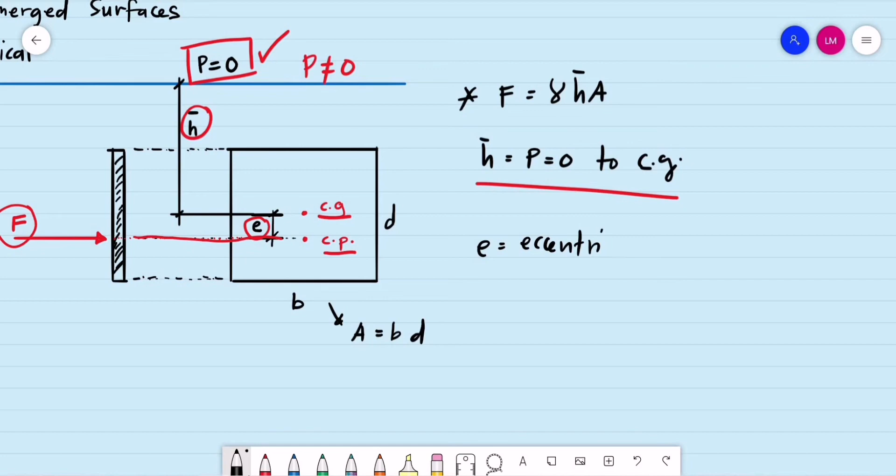So how do we compute for the eccentricity kapag vertical surface? That is, the eccentricity is equal to the moment of inertia of the section divided by the area of the section times the bar h. Again, yung formula na to is applicable only for vertical surfaces.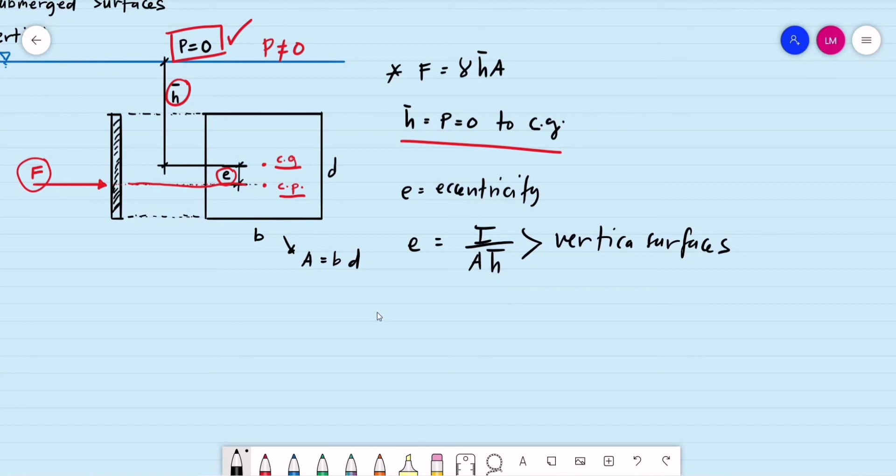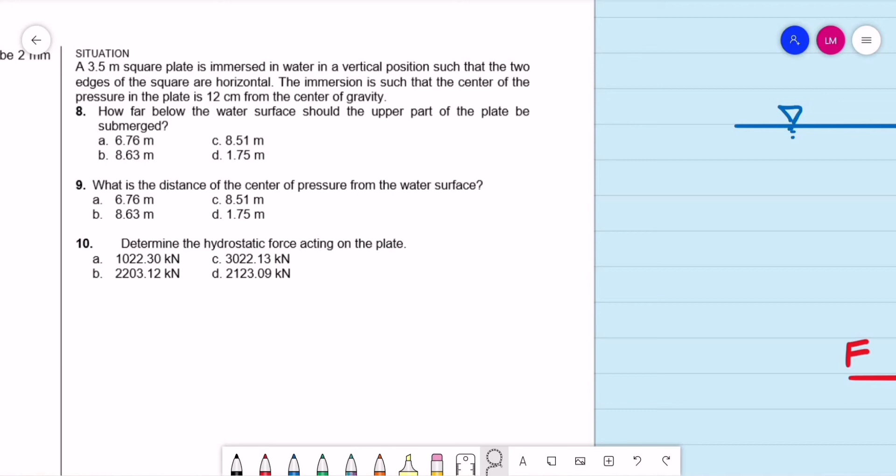Okay, so let's have an example for this case, let's have this situational problem. Lumabas na rin ito noon sa board exam. A 3.5 meter square plate is immersed in water in a vertical position such that the two edges of the square are horizontal. The immersion is such that the center of pressure in the plate is 12 centimeters from the center of gravity. Take note na yung distance from the center of pressure to the center of gravity, yung tawag natin doon is yung eccentricity, that is E. So given siya as 12 centimeters, that is the same as 0.12 meter.

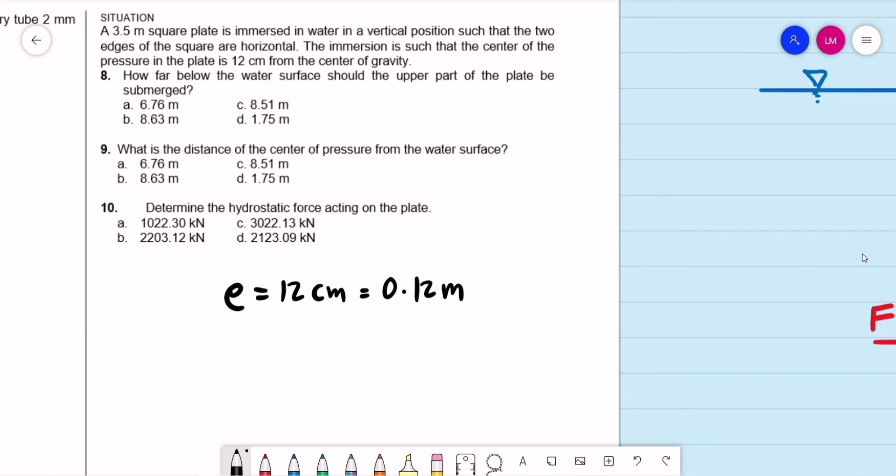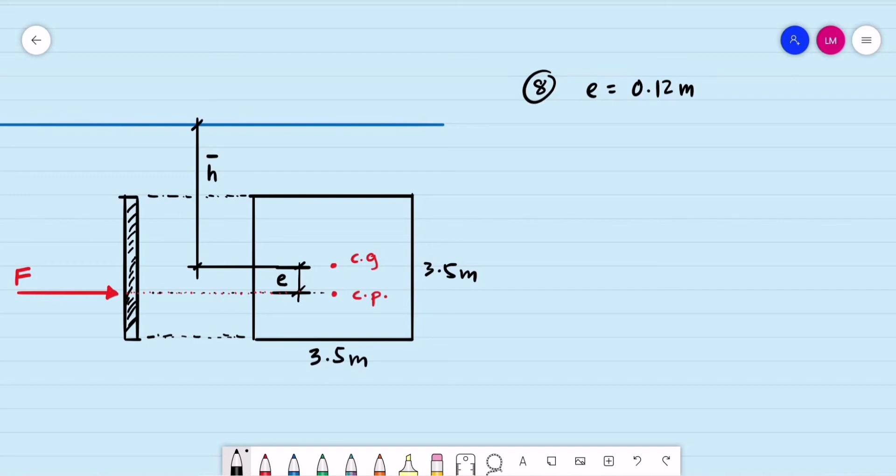So question number 8: how far below the water surface should the upper part of the plate be submerged? Okay, so ito yung plate natin, submerged plate. So according to the problem, that is a 3.5 meter square. So far, ang given for question number 8, yung given dito is yung eccentricity, that is 0.12 meter or the 12 centimeters.

So ang hinahanap natin dito sa question number 8, gaano raw kalalim yung upper part or upper edge nung plate. So sabihin na lang natin dito, ilagay ko na lang siya as, let's say this is the h sub 1. Okay, so since given yung eccentricity, how do we compute for eccentricity? Ito yung E equal to the moment of inertia of the section, this is divided by the area of the section times the bar h.

So for rectangular section, kapareho lang din naman sa square. Ito yung BD cube over 12 for the moment of inertia. So using yung formula na to, makukuha muna natin. Okay, first thing to solve ay yung bar h. So, eccentricity, mag-substitute tayo.

The eccentricity is equal to 0.12 meter. Ano yung moment of inertia niya? Ito yung base niya is 3.5, yung height ng square plate is also 3.5. This is a cube all over 12. So all over the moment, the area, ano yung area niya? That is a square, so 3.5 times 3.5. This is multiplied by the bar h. So compute natin yung value ng bar h.

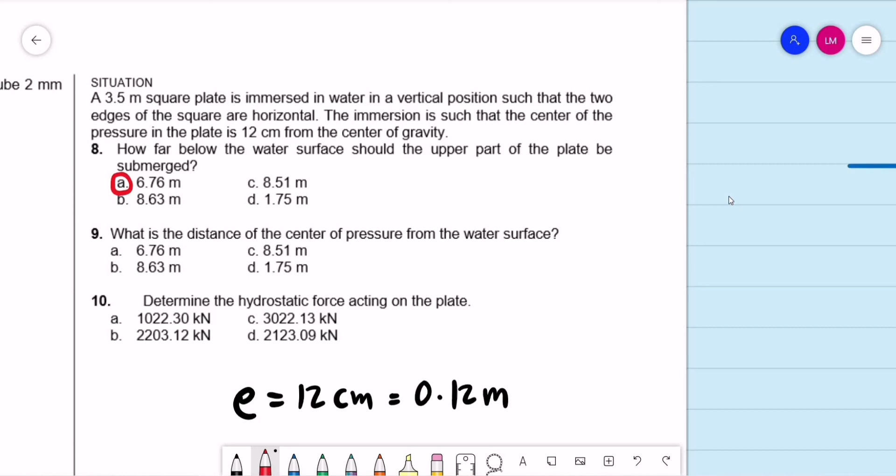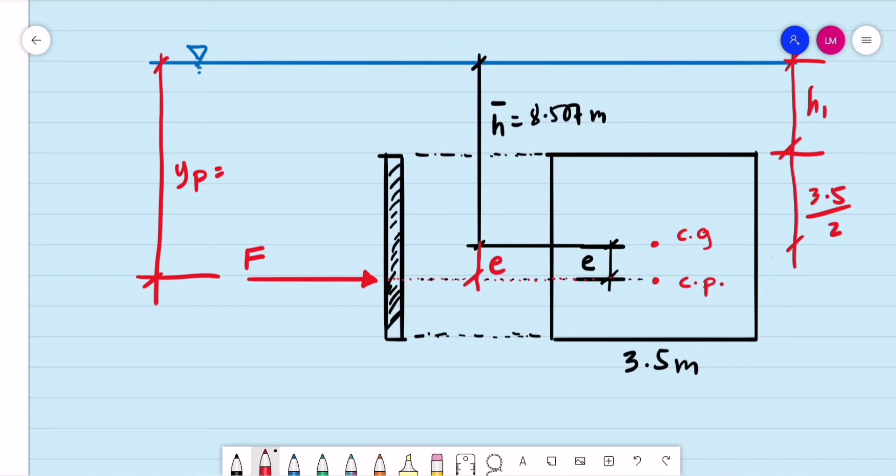What is the distance of the center of pressure from the water surface? So yung center of pressure, that is the same as the location of the point of action ng total hydrostatic force. Sabihin na lang natin that this is the Y sub P. Paano ba kumuha ng Y sub P? So basically, ito yung Y sub P o yung location ng center of pressure, ito yung bar H, idagdag lang natin yung eccentricity. So Y sub P is simply equal to the bar H plus E. Yun lang naman yung question number 9.

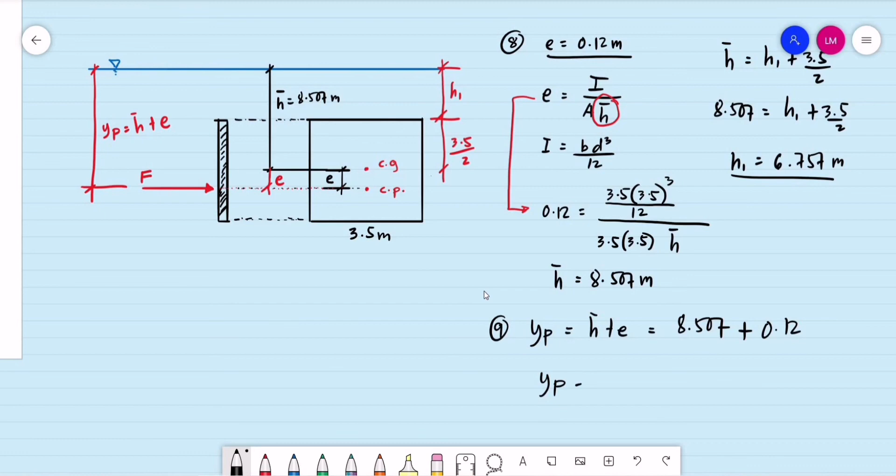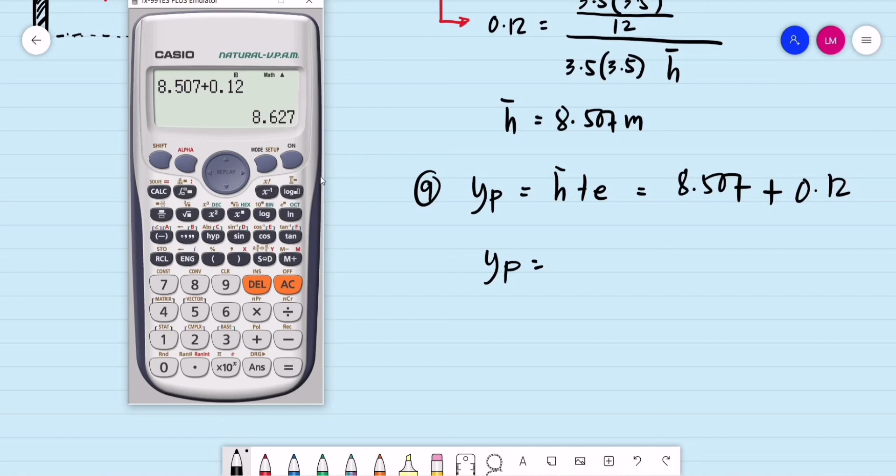Okay, so for question number 9, the location of the center of pressure, nilagay ko dito as Y sub P. Ito yung bar H plus the eccentricity. Ano yung value ng bar H natin? That is 8.507 meters plus yung E, given na siya kanina, that is 0.12 meter. So this is the depth of the center of pressure. Kunin natin, that is 8.507 meters plus given eccentricity, 0.12. That will be equal to 8.627 meters.

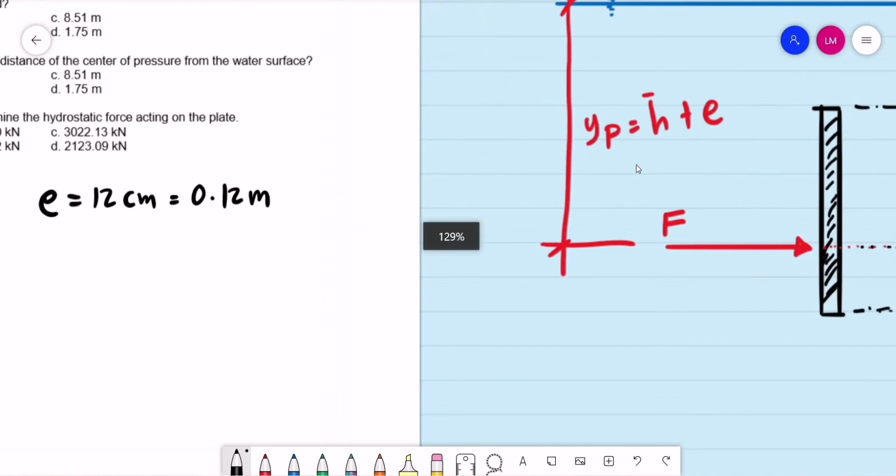Check natin sa choices if we have this value, the 8.627 meters. Pinakamalapit sa choices, that's problem number 9, 8.63.

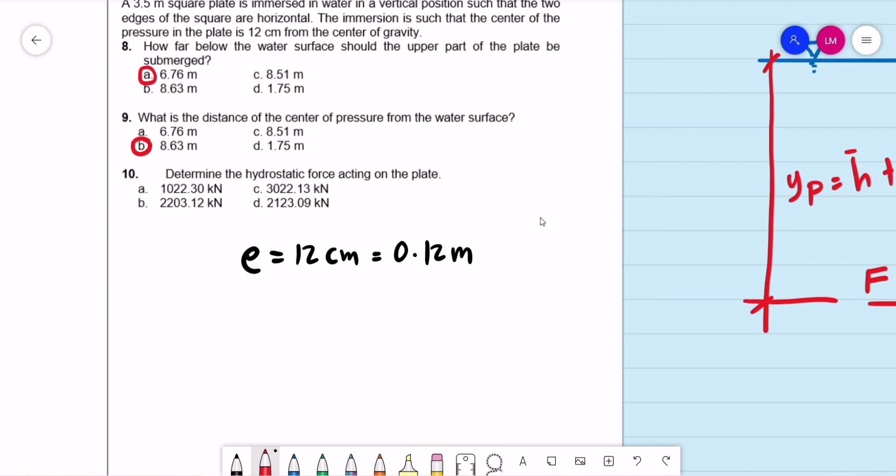Then sa number 10, determine the hydrostatic force acting on the plate. Take note na sa problem na to, wala siyang binanggit pala na liquid na pressure sa liquid surface, kaya parang i-assume natin na zero pressure yung surface. Yung question number 10 is hinahanap yung total hydrostatic force. So for number 10, applicable ito, gamma bar H times the area. Sinabi sa problem na yung liquid is tubig. We have the gamma that is 9.81 kilonewtons per cubic meter.

Na-compute na natin to kanina, yung bar H. Okay, the bar H is equal to 8.507 meters. Ano yung area? That is a square plate, that is 3.5 by 3.5, so basically yung unit nito ay square meter. Kung mag-unit analysis tayo for this first example, square meter, cancel yung cubic meter. So obviously, since force yung hinahanap natin, dapat yung unit ay nasa kilonewtons.

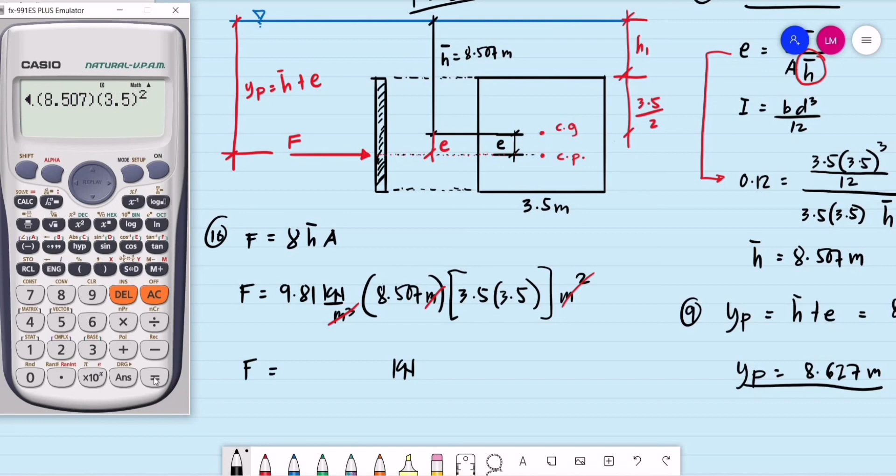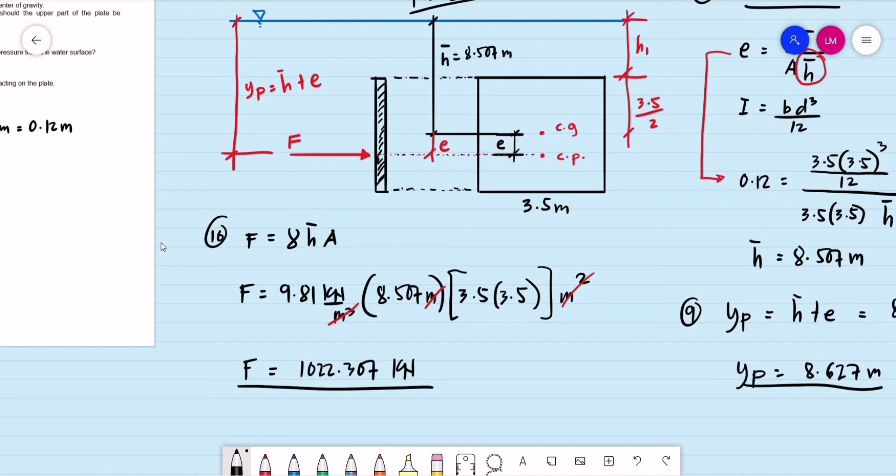Okay, that will be 9.81 multiplied by the bar H, 8.507, then multiplied by the area, 3.5 squared. So we have that as 1,022.307 kilonewtons. That is for question number 10. Check natin, yung pinakamalapit na dito will be 1,022.3, letter A. So this will be our solution for situation 8, 9, 10.

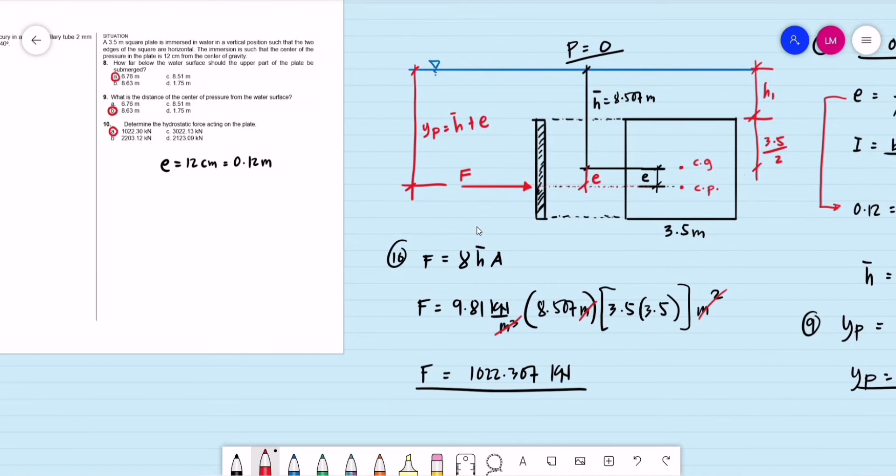Okay? So again, lumabas na rin ito noon sa board exam.